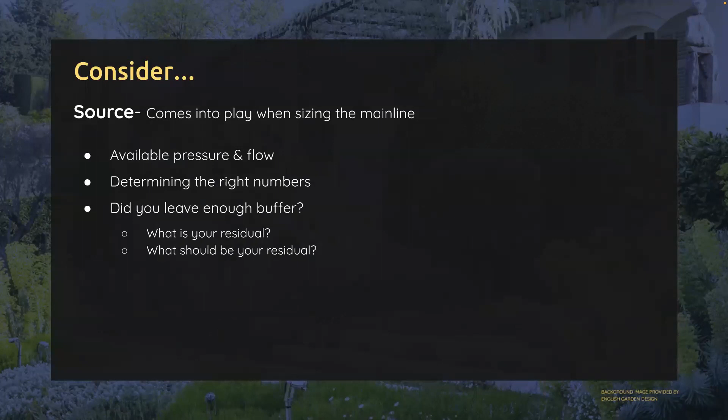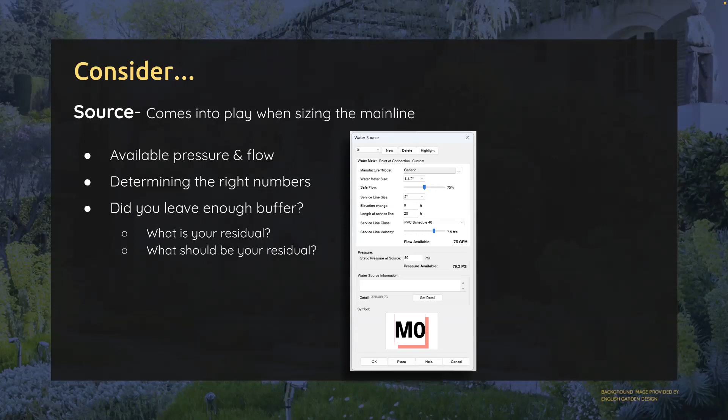But being able to have that conversation about what those numbers are, what we have available, what we even need, is going to be really important so that we're not getting to the end and being confronted with these negative numbers, like, why are we exceeding what we have? Well, if we have that conversation up front, we know how to plan the rest of our design. So it leads right into this buffer of what we should have left over.

A little tip that I always like to tell people if they're saying, I don't know what the source is, or I'm not given those numbers.

Like, how do I know what to put there? If you set your water source as a custom, you can actually zero out the flow and the pressure and get a negative value. And those negative values are going to be what the demands of the system are. So now you can take those numbers and have that educated conversation with the client or the city or whoever it is to say, hey, this is what we need to work. And then you can actually add that additional buffer that you might need on top of it.

I know a common number is 10% of what you have available should be what you have in residual. So if we had a static pressure of 80, we should have an additional 8 pounds to work with after all is said and done.

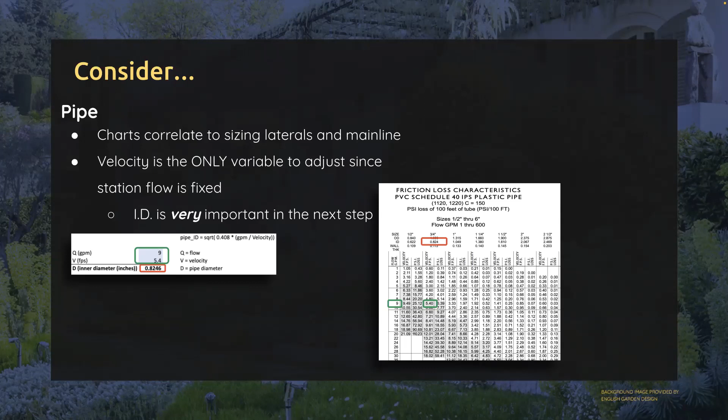So if you compare the formula itself to what the pipe charts show, you can see that I've got a flow of 9 GPM and I want it to be running at 5.4 feet per second. Well, I'm going to need this inner diameter pipe in order for it to operate that way. So if we start to understand these concepts of knowing which values we're looking for and which size of pipe it's going to be given, it's straight up math at this point. And we have tools in Land F/X that really help you with that.

So a tool that I'm going to try to show off in the live demonstration is that flow zone, the little image right here to the left. If you had your own little calculator, this is doing the same thing, but it's nice and built into the system. And you can use that as a cross-check to see what size you're anticipated to get based on the flows and the speed.

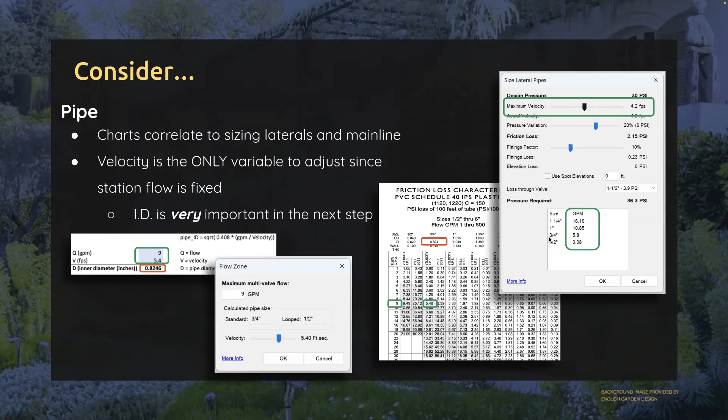And this is why when we're sizing our pipes, whether it's the main lines or the lateral lines, the only variable that we really need to focus on, and obviously there are a couple other options to help buffer that or cross-check and limit what we're doing to the system, is that speed, because the system knows that the zone you're trying to size has a set flow, and you are basically just altering how fast it is going and allowing the system to choose the pipe sizes appropriately from that.

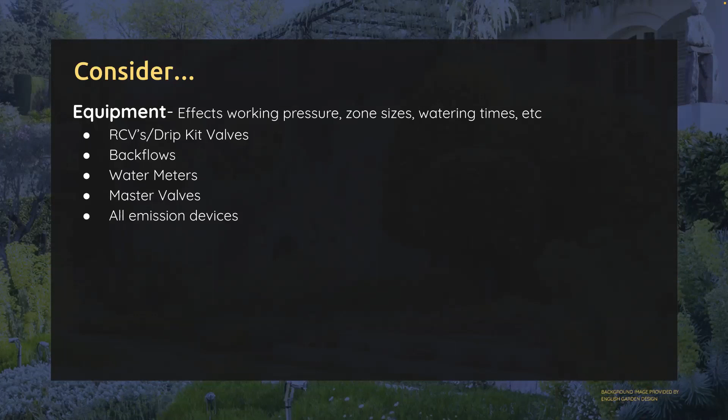The equipment is really determined by a lot of things. Obviously, our site conditions, whether it's elevations and soil and sun exposure, but also client expectations. All of these things should be considered heavily in that discussion right up front. We should be looking at the equipment that we're picking, looking at those pipe charts, looking at the performance data charts, looking at all of those pieces so that we are making educated decisions on, hey, what size should I be using here in this condition?

This is really important when you're just going through that process of picking that equipment, and to be able to then have that discussion with the client, being able to add the equipment that you think you want to use, run a schedule of the entire palette, and have that conversation with a client for approval.

This is going to really mitigate the whole headache down the line of, oh, I picked the wrong stuff, and now I'm battling with this either out of its performance range, functionality, or whatever it is, to be able to dial those things in even before starting.

And the other thing to note here at this level of picking equipment is understanding that we have schematic, and schematic is a really good place at this stage of things because it's way less effort. And again, if we are understanding these calculations, we can set up our schematic areas to function the same way so that we can simply place hatches in areas to generate flows to understand what kind of head types and valve types and how many zones we're going to need at a very basic level or a high level, so that we're not sitting there wasting all the time placing everything just to have to redo it.

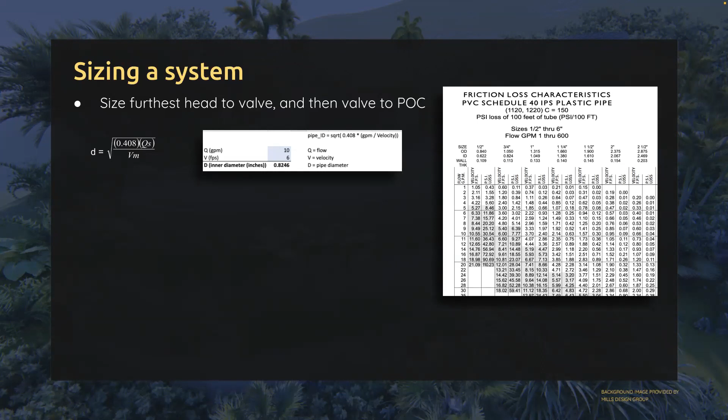Now, when we're doing this, sort of call it the old-fashioned way, we are determining those pipe sizes, but at the same time, we are looking at the velocity and the friction loss, just because this pipe chart is sort of wrapping it all together. But if we're understanding this, it happens in two buckets. We are looking at how much flow we have, and how fast we want it to run, and we're choosing that pipe size. At that point, we then need to figure out that friction loss, and that's that other bucket.

And I'm going to admit here, for the longest time, I was very afraid of this formula, and not understanding, yeah, we use the Hazen-Williams formula, but what does that actually mean? Like, I just look at the pipe chart and that is what it is, right? Well, if we're going to break this down, it's super easy. And I created spreadsheets back in the day to be able to help cross-check, like, okay, these are the values that I need to try to figure out.

What is that pipe coefficient? The smoothness of the inside of the pipe. What is the flow going to be, and what is that inner diameter? So if you know those three pieces, that is literally all we need. And I think there's a misconception of going, oh, the Hazen-Williams formula, it's all about the velocity and stuff like that. Well, it's actually a little bit backwards from that. I just need to know my coefficient, my flow, and my diameter. Well, how do I know my diameter? That's where my flow and my velocity come in. So it happens in two different buckets.

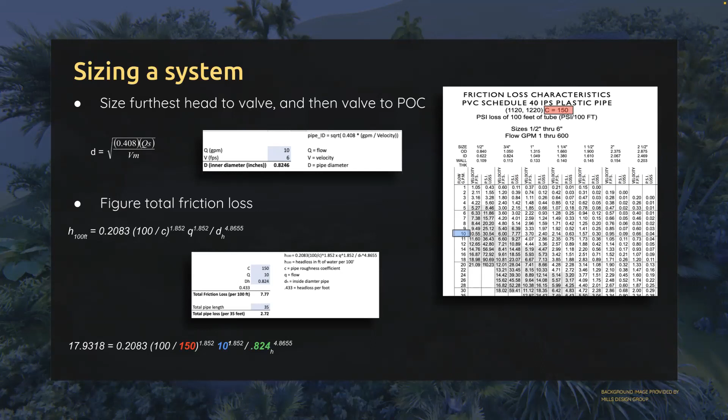But if we're going to break this down and do this little example here, we've got a red number, our blue number, and our green number here. So it's simply three things. If I know my red number and I know my flow and I know the pipe size, because I know the flow and my velocity, I can determine what my actual friction loss is going to be. So this formula really breaks down into these three different buckets and follows the pipe chart perfectly. And that's how these pipe charts were derived. And it's very easy to now navigate this and determine what pipe you're going to need based on this.

Now, the tricky part is this. We can follow these pipe charts for what they are given, but what if it falls outside of this range?

What if it's 10.5 gallons, or what if it's 8.2 gallons? You know, what do we do there? Well, if we take that concept and just know that we have a given flow and the velocity that we want to stick with, it's still going to give us our inner diameter pipe, which means that we've got to fit it into what size is available.

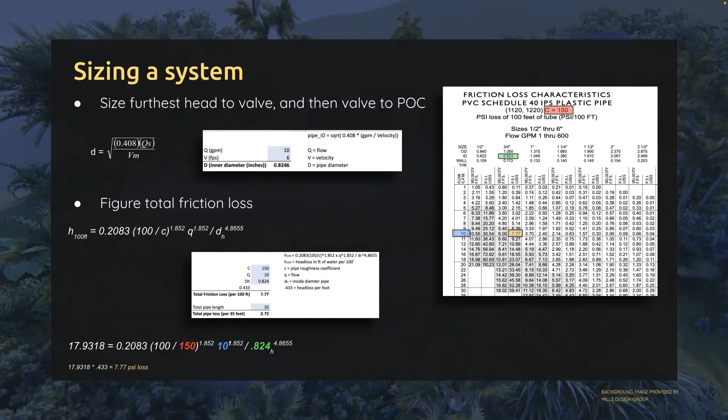So from there, where does that actually play into when it comes to using software? So our design pressure, our emission data, the performance data, that all happens when we're adding that equipment to a project, okay? Every piece of equipment that we're picking from any manufacturer is going to come with all of the data pre-built into it, respective to what we're given from a performance chart, okay?

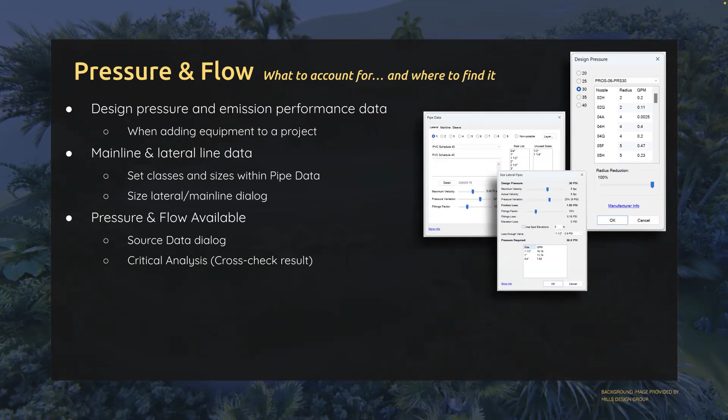And so picking that design pressure is setting that benchmark of, okay, this is what I need to start accounting for from that furthest head, and working my way back through with the given flows per head and how many heads there are and what the length of the pipes are. All of that stuff gets thrown in to then go, okay, based on that, all of my classes of pipe that I'm setting up for my laterals, what sizes am I allowing the system to use in the performance of that velocity, and when I get back to the point of connection, what do I have available? What is my source data set to, and how is that cross-checking?

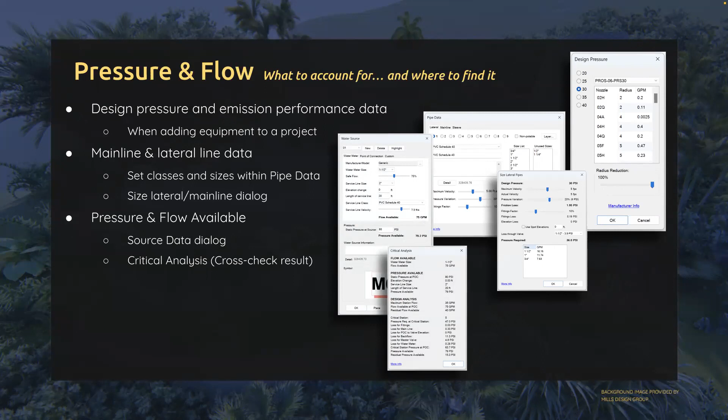So the final cross-check that we're really after here, again, somewhat as a reminder, is a critical analysis. And a critical analysis isn't necessarily, I mean, we obviously want to know globally how the system's doing, but our focus is, what's our worst case scenario? And that is our cross-check. So to be able to run this critical analysis and understand what pressure I have available at my point of connection, are there any elevation differences, to, okay, what's my maximum station flow? Am I in the positive there?

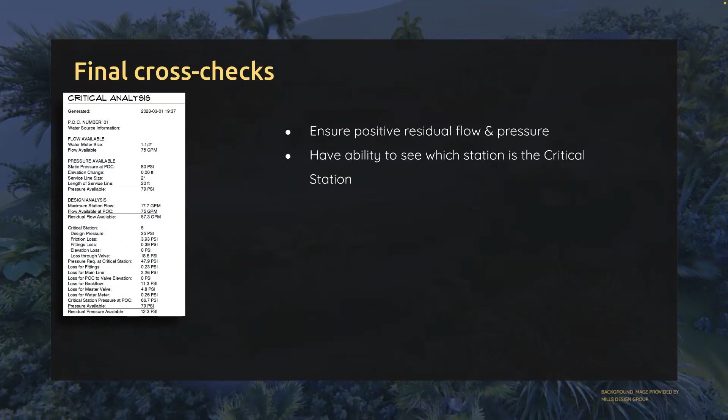And then the most important thing, which is pressure, and what station is causing the worst case scenario for that pressure. And we can cross-check that single critical analysis with a valve schedule, which holds all of that additional information, just to see how every other station fits. And if we know the critical station, and it's our highest demand of everything, then anything underneath that we know will work. And that's why it's less important that we know every single one, but we know for a fact this is the worst critical station here.

So here's our flow that is cross-checking, and then this is our critical station pressure that we need at the point of connection in order for it to run. And so again, what are those residual pressures? Am I in my buffer that I really want? And again, that really is up to the office to decide how much we are willing to have left over. But as long as it's a positive, obviously we're on the right track.

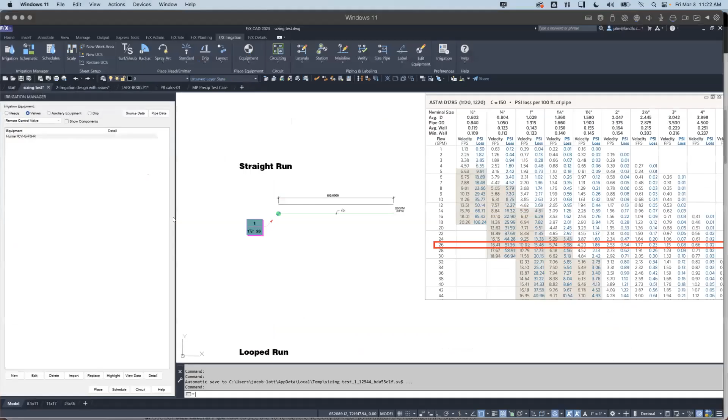And so this you can walk through in the test file that we're going to go over to see how the system's actually functioning with the different paths and lengths and stuff like that. So just know that this is kind of where I'm going the first of it. So we'll jump right over to CAD. And this is going to be what you see here.

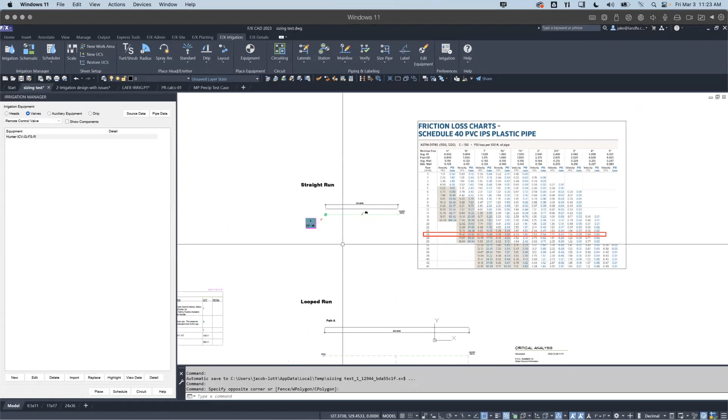You actually will not see this in the downloaded file. This is just for our reference, so that I can compare with a chart right off the bat here. So there's definitely different ways of setting up test cases. And I think it's really important just to understand what our end goal is for what tests that we are producing. So in this scenario here, we're just trying to figure out, okay, how is the system sizing it the way that it's sizing it, the pipe itself right here.

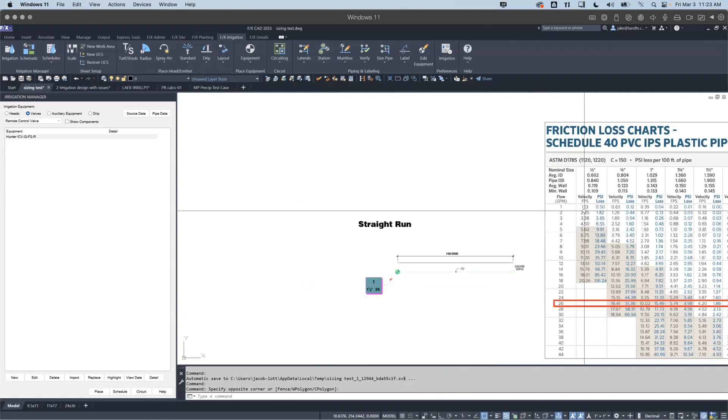So what are the ultimate things that I need for that to happen? And that is obviously a comparable length. So we're doing this in a 100-foot span because that's what the pipe charts are going off of. We need to make sure that we are cross-checking it and using the proper actual pipe class itself so that we're looking at this.

And in my PowerPoint, where we talked about pipe and the importance of that inner diameter, I will tell you right now, there are so many different varieties of inner diameters, even in the same pipe class and different schedules. They're slight, but when you're trying to get an apples to apples comparison to see what the total friction loss is, okay, yes, it's doing that. It absolutely comes down to the decimal place for those tests.

So just understanding that if you're getting any kind of varied result than what you're trying to test, it could be the coefficient, could be the inner diameter from like a 0.001 decimal place. So the velocity by a decimal place, those 3 different little spots really are where we're going to try to focus and try to harness exactly to line up with this.

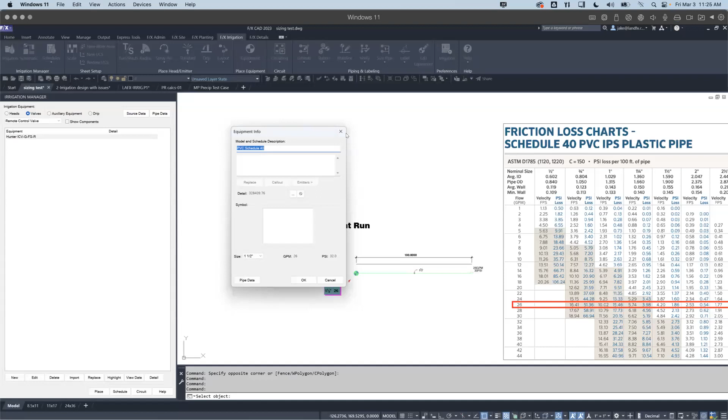But you'll notice that I haven't placed any heads. If we're not familiar with what a cap is, a cap is an auxiliary piece of equipment that we offer in here. It's just right here, this cap. And if you add one of those, it basically assumes a specific demand that you give on it. So set of flow, set of pressure, you pipe to it, the system will size based on that demand there.

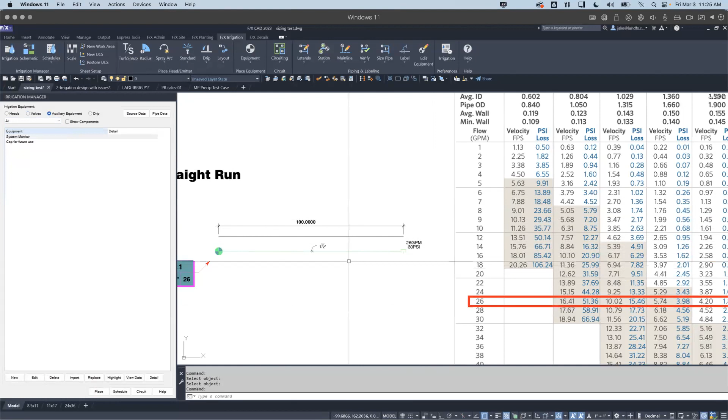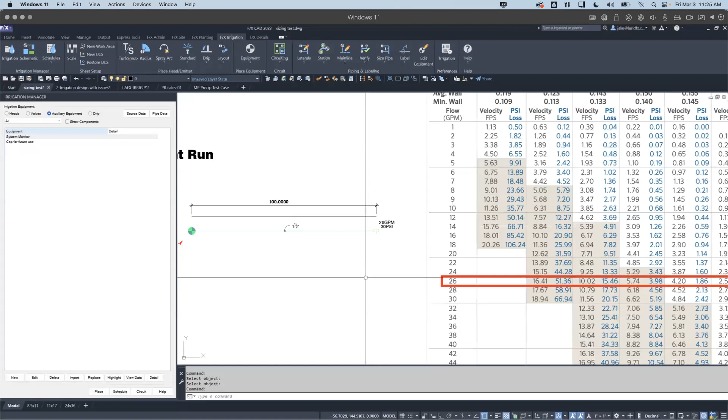So our little quick down and dirty example here, we are going to just use that cap for that purpose. Makes it really easy for us to alter if we're looking at this chart and trying to test another range of flow. Really easy to actually just double click on that guy and change him. But we're going to focus on this one because it has a couple whole numbers that we're going to kind of focus on so that you can see.

So in this case, what we want to do, just from making sure that the system's good, and I guess I should preface this too. Let me go ahead and show you this new flow zone. I forgot I wanted to show this to you. So in the size pipe section, we have this flow zone option. And this flow zone option has other uses down the line, especially in golf course or larger designs that you want to limit flow in specific areas and still let a lot more flow when you're sizing the main line.

You can always click more info to get the full down and dirty on this thing, but we're going to use this tool for our purposes here today as just a cross checker, just a calculator, just to see what it is. So if we typed 26 GPM and we had that velocity set at 4.2, you can see right off the bat that it is kind of following this. So what if we change this to 4 gallons and a 4.5?

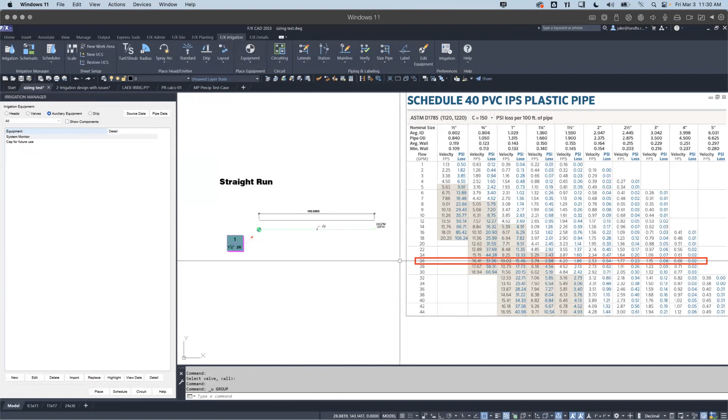So maybe I want to double check it a little bit more and say that I'm going to try to do it at around 5.7, just to see if it's going to really change this 1.5 inches down to 1.25 inches, right? So if I start speeding that water up, nothing's happening because it's within that range of its inner diameter there. And as soon as I get past that point, okay, so at 5.8 here, so 5.74. So this is under that number, which means I'm still fine.

And as soon as it hits that 5.74, where our only option is 5.8, you can see that now he's adjusted. So I know right off the bat, this is finding the exact size of pipe, even based on this chart here. And again, I'm stuck in this horizontal position here because my flow is fixed. The only thing that I can change here is how fast that water is going, and how it's going to size that pipe. That's where it's sticking.

So if I were to speed that clear up, the smallest I could get is 1.25 inches because I can't go up to 10 feet per second. And I wouldn't want to, right? If I slow it clear down, I can see that I'm starting to get into those larger sizes. So that concept of slowing the water down increases your pipe size. It's because it's getting less friction loss and the water is moving much slower through those pipes.

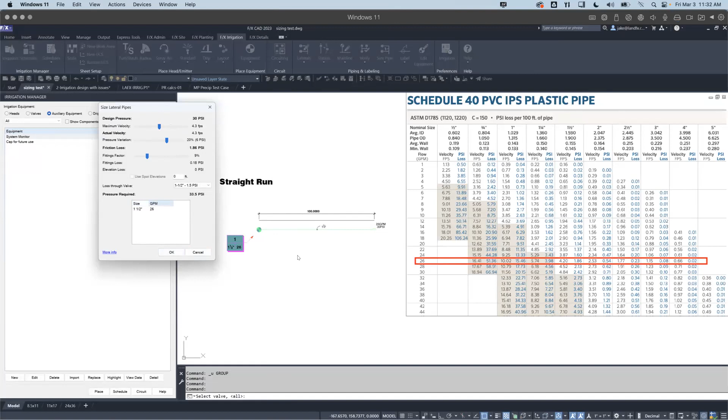Okay, so with that being said, we know that this is now calculating correctly. So I could essentially do really any form of run and a flow at any point and know that the system is cross-checking that. Once we get into those looped runs, same concept applies, but we're now starting to go, oh, you know what? It's splitting the flow.

And here's the difference in what we would typically do when splitting flow around a loop line: we just go, I'm going to split everything just in half. I'm just going to cut it in half. Well, that sort of works. But if you really think about it, and this is how we've thought about it, which path do you think is going to get the water first to this point right here? Well, it's got to be the shortest path, right?

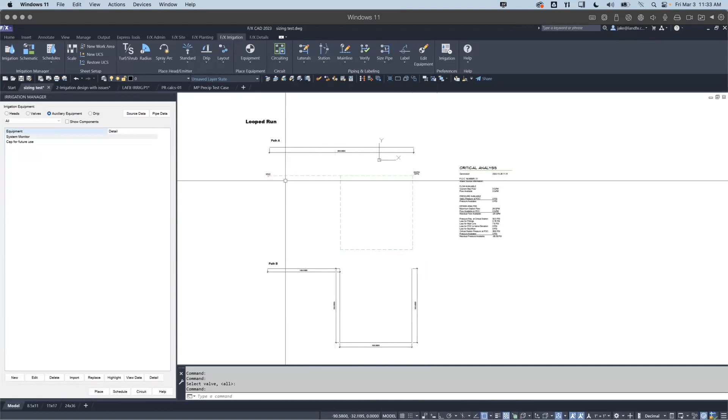There's going to be more water that hits in this run than having to make its way all the way around this way. So what the system is doing is it's splitting from a flow perspective. We'll just edit the equipment so you can see here, this 26 GPM. Well, I've got 17 here, so half of 26 is 13, right? So that's not 13. Well, that's 9. So it must be doing something. Why is less going this way?

Well, we've basically taken the path distances and we've created the percent of the flow that gets through the long run versus the percent of the flow that gets through the short run based on their length distances. So it's calculating those numbers based on that, and then it's calculating the losses based on that demand of water. So it's sizing it appropriately for those cases there.

Now, I'm going to pause right there before we move to the next thing. Are there any questions? Do we have any arguments to where we're at now, Jer? No, nobody's arguing yet. They were going great. Okay, cool. All right.

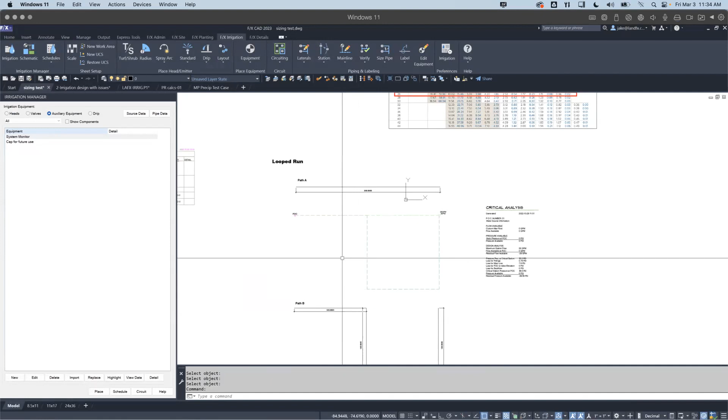Now we're going to jump over here, and my hope is that we can start pinpointing now from the assumption that we've done a project and verified everything. I can't stress enough, from a workflow perspective, that as you verify a system, you're doing this periodically through the design, making sure that you've got all your unpiped heads checked, and on the verify mainline side, that our lateral pipes have been sized. The importance of that is that we want to make sure we're accounting for everything before we start making those final decisions on sizes.

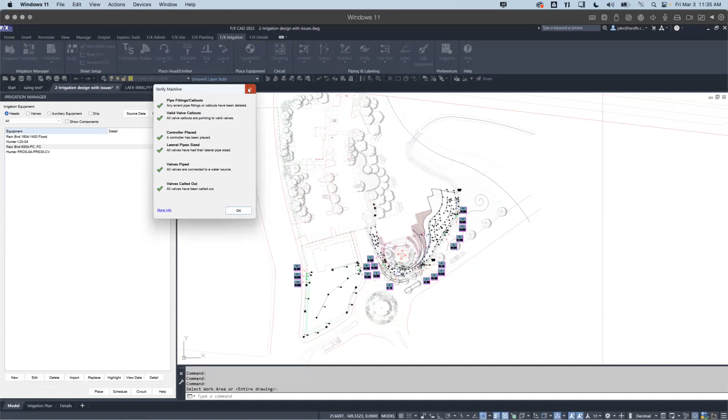If we've sized our valve and we're missing some heads, or something wasn't connected properly, then that valve number is incorrect, which means when we size our pipes or our main line, those are going to be incorrect. So the verify step is super important. So we are assuming that everything is good, ready to go. And one last check: as you are sizing the system, we do have the size all option, where I can just size every single valve. In certain circumstances that's really nice, because it quickly gets you through and sizes it appropriately based on some simpler conditions.

However, I can't stress enough that you should be going zone by zone to actually pull up the size lateral dialog box to make the right decisions. The reason we do it this way is because once you size it and maybe make some alterations in how the system is performing with that zone, it saves that velocity for that zone. But if you size all, it wipes it out and blanket applies the speed for every zone, which, depending on the scenario, is okay. But sometimes different stations require a slower speed in order to actually function. And that's where this actual velocity comes into play. The actual velocity more than likely is going to match whatever we've got here.

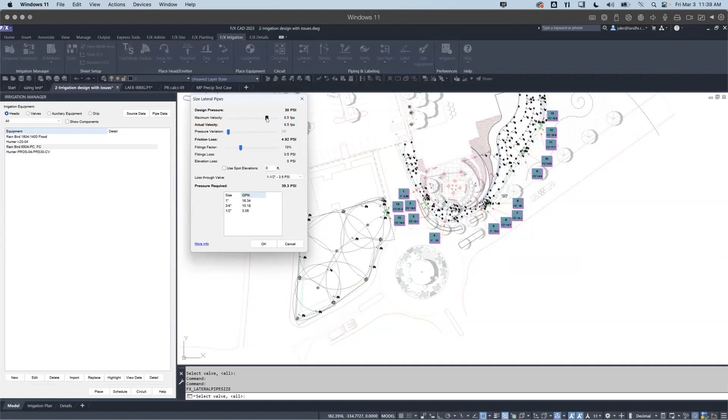You can see there's going to be a time that the actual velocity changes. That obviously changes what our pipe sizes are going to be. But if I set this pressure variation too low, I'm going to have a problem. And so, just in general, if you're sizing all valves at the same time and you have this pressure variation set to where it is blocking a valve from working, this is the message you're going to get. It's going to say, hey, I've tried slowing it down, but I can't get to that. Maybe you need to adjust something, kind of a thing.

So the size all does impact what the system's looking for from a velocity perspective, because it will auto change it if it needs to. But if you're setting that limitation, it's gonna cause a problem. So we'll go ahead and set it for whatever it is. Let's find out where that is, right here. So if we set that pressure variation, you can see that the system's going to say, hey, you need to slow that water down so that it doesn't breach that. And this percentage, by the way, is a percentage of your design pressure. So set it if you want to have those safeguards in place.

Turn it off if you're loose and willy-nilly on things and don't care how much friction loss you got going on. Go ahead and do that. So just know that if this is off, the velocity is going to be the determination on really how much friction loss you got going through the pipe. Obviously up to a certain point, right? The flow itself, no matter how fast you go with that, is only going to go so much based on the size of pipes that you have available. So it'll change in relation to that.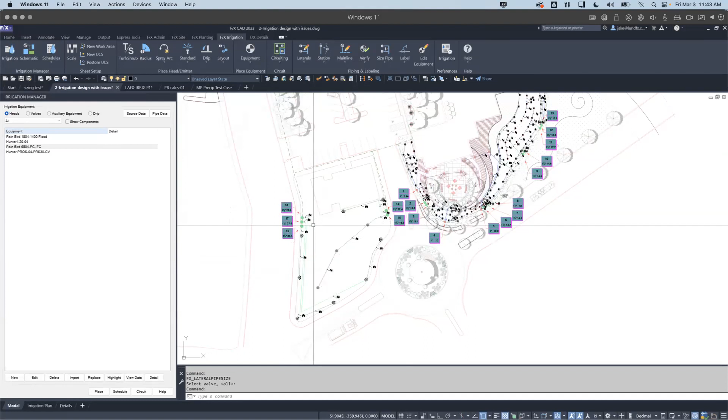Do we want to pause for 2 seconds and just see if there's any questions there, Jer, or are we good? We've got a few questions stacked up that I'm answering now, but I think you can certainly keep going. Cool.

So that's just my little plug as far as, okay, you've gone through things and you're sizing stuff. Just make sure you're kind of aware that that's how we should be doing it. Size all is great.

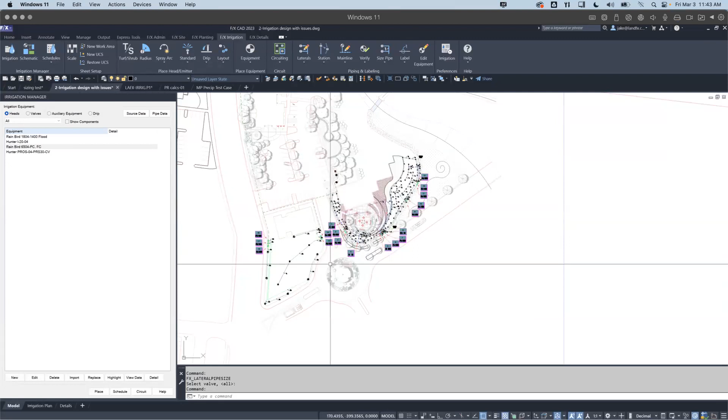I love that one, but it's a little dicier is all. All right, so before getting too much further in here, I really recommend running a valve schedule. This valve schedule is such a good snapshot of how I've got it set right now, before even sizing the main line, before getting into troubleshooting what I might have wrong.

I do enjoy seeing everything. I check on everything just so that I know what I've got going on here, so I'll go ahead and check everything. Now I do have specific work areas, which limits what the system is looking for. I've got a secret other place up here that we're going to do something for, so I'm looking in this area specifically. I'm going to click on that work area and run this valve schedule.

So this valve schedule, and we'll break this down right now, gives us a snapshot of how the system's set together right now. Can't stress enough the importance of a valve callout. If you're not calling your valves out, maybe waiting to the very end, you're doing yourself a disservice, because if you see a bunch of unknowns everywhere in that valve schedule, it's really hard to know where to look for stuff.

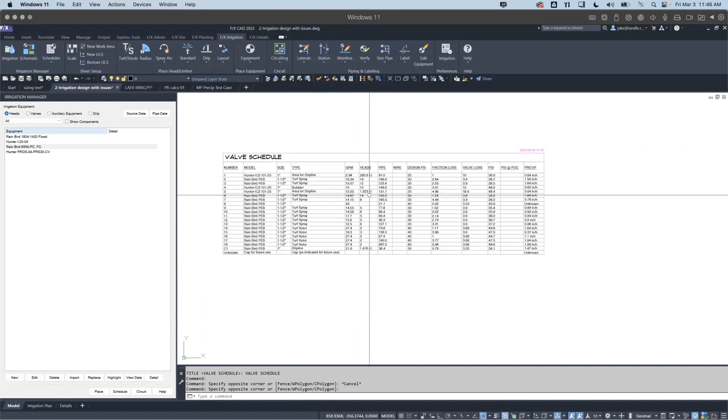This gives you a snapshot of not only the type that it's watering, based on your equipment, but the total flows, the head count, which sometimes is important, sometimes isn't, but it's fun to see how big of a zone this turf spray is versus one of these, and why. Because that sometimes affects why you're getting too high of loss or too low of loss. You can't have too low of loss. But the design pressure, this is a really important one.

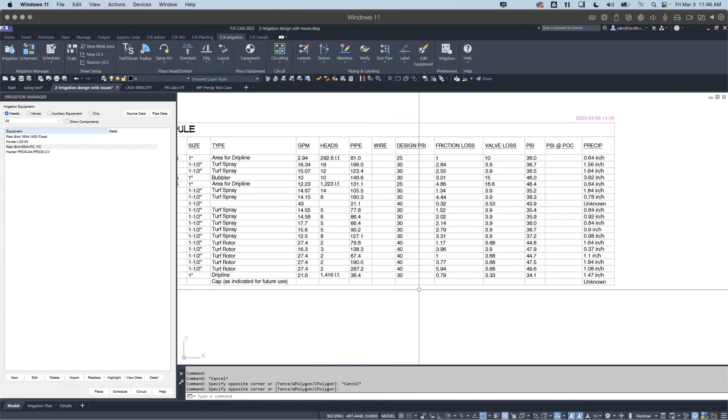This design PSI column is such a good number to cross-check, because as we're setting up our water source, that design pressure should not be close to what we've got. So I can run this valve schedule and look at my source data. Looks like I have 45 PSI available at my source, and after the loss through the water meter, I've only got 44. Whoa, that's a low starting point. I already see red flags.

So if I see these design pressures set at 40, I know that's at the design pressure stage. What is that doing at my actual valve after sizing that lateral? I can see I've already exceeded: 48, 48, 43. So I've already cross-checked myself before the system has stopped me. This is such a good way to start addressing stuff before it even happens.

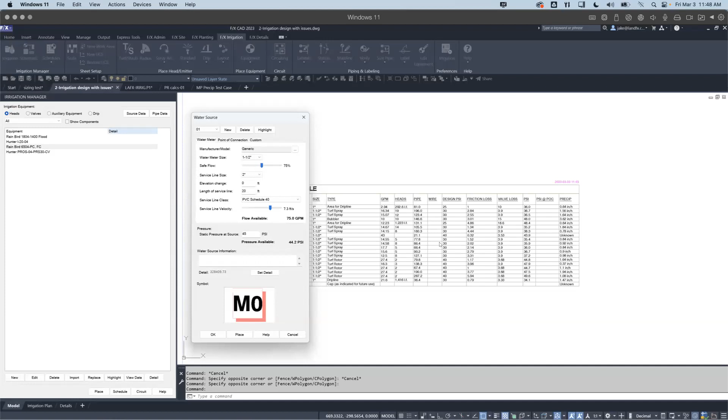And again, knowing that design pressure from the equipment selection point is such a key thing, to know, okay, we've got low pressure, so we can't use larger demand types of heads. Or maybe we do, and we start talking about a booster pump. That's the kind of stuff I really enjoy looking at here.

The friction loss is obviously important from the lateral pipe sense. We can start to see, wow, I've got quite a bit going through some of these, and why is that? I can see these are some of the higher flows that have higher friction loss, and what can I do to remedy that? Maybe I can't.

The valve loss, I think, is one of the bigger points in this whole grand scheme: when I'm sizing this, why is it saying that it's the critical station? It really comes down to the ultimate number of PSI at the POC. We'll get into that next. But I like running that valve schedule; it really helps show how things are. And now we're ready to size the main line.

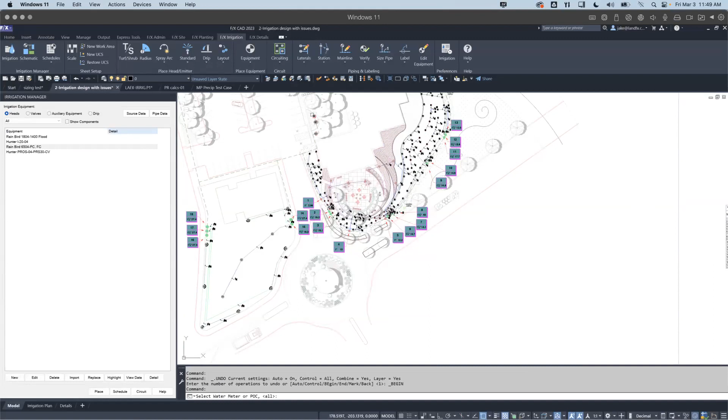So we'll go ahead and size this main line. You'll notice at the command line: select a water meter or POC or all. If you have multiple water meters, I really recommend clicking on the one you want to size. It's much easier to see where the errors are happening, instead of assuming which one has bombed out and why. So I'm going to pick my water meter.

And I have a little simpler box than that size lateral. And the only thing that we care about is, well, 1.5 things: whether we're doing a single valve at a time or multiple valves at a time. And the reason that's important is because that's setting our flow benchmark, okay? So when we talk about the size of pipe, we care about two things. We care about our flow, and we care about our speed. And that tells us what size we can do.

So if we are sizing one valve at a time, this little grayed out number is showing us that this is the highest flow out there, the highest demand of flow, and that's what it's going to account for as it sizes the system. Anywhere else that it hits a branch that doesn't need that, obviously it will size according to that highest flow, but in the system itself, this is the number that it sees.

If you choose multiple valves at a time, this number changes to your available flow from your source data. So it's saying, hey, go ahead and use all of what's available, and it'll combine as much as it can valve-wise up until it hits this number. So if you want to be, call it safe on it, and maybe set it to more of a limited amount, you're welcome to set that here.

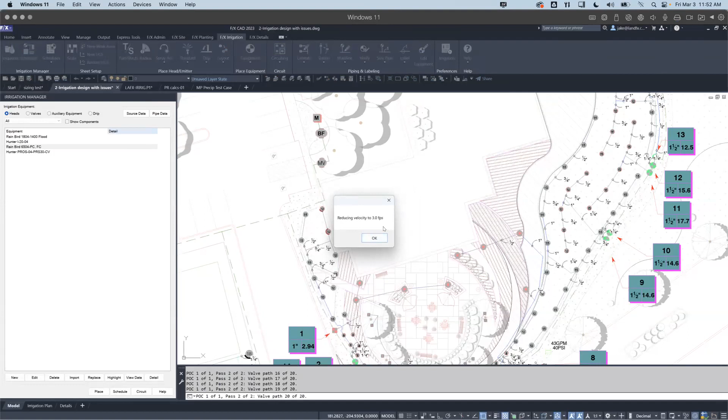The system's only going to go till 3 feet per second. As soon as it hits 3 feet per second, you kind of assume you're not going to pass, because if it stops it here, then we know that something is probably lower than that, and you've got to address it from there. I will suggest that you say yes to this, at least until you start understanding what it is, but it's going to highlight those valves that have the exceeded requirements.

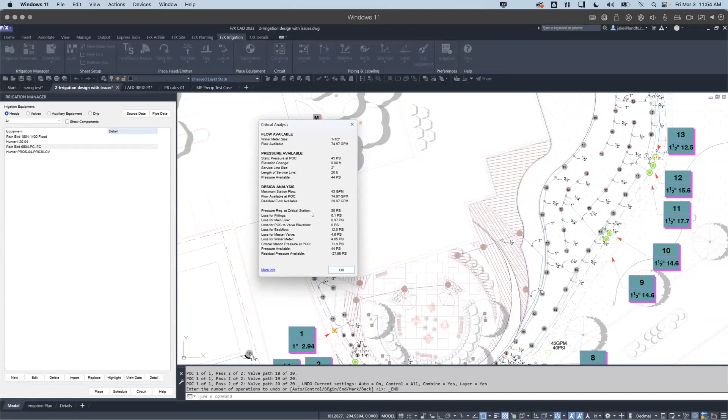So what do we do? Where is that critical station, 50 PSI? It doesn't even tell me a station. And so there's something in here that is requiring 50 PSI. How do I find it? Well, our locate valve command. I type locate valve, it's in the station tool set, right up here in the station. But locate valve allows me to select a POC, or I can right click for all.

And now I can look for, and I'll filter it so that it's in gradual order here. I can see there's the 50 that it was looking for. And there's no number here. Let's see what it is. Found it. It was that cap right there at the end.

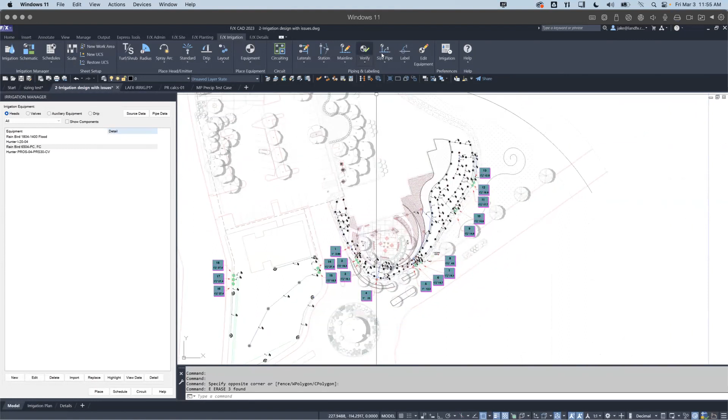I was anticipating for future use, I wanted to size up so that I had a certain amount, but it was just too much. For our purposes and speeding this along, I'll go ahead and erase that, and let's go ahead and just try it one more time. Size that main line.

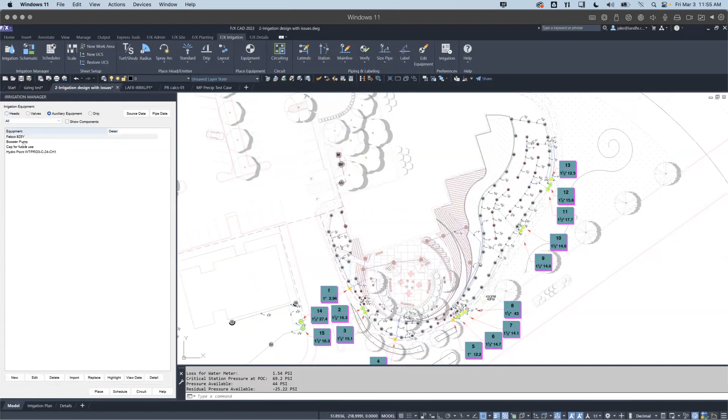All right, so still got it, still hitting everything. All of these valves are exceeded. So now I know for a fact I'll probably have to start looking at a booster pump because I don't have any big ticket equipment things in there. So let's go ahead and just insert a booster pump. Auxiliary, I've got a booster pump already added. We'll just go ahead and place them in here.

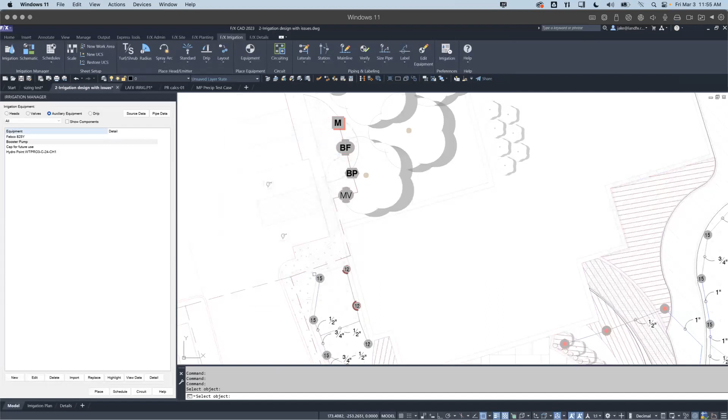BP. And when I add a booster pump, it's obviously giving me that ability to set what my pressure increase is and the max flow that pump can handle. So we'll go ahead and try to size that pipe again one last time because I've increased my pressure. I know I'm good now.

Well, looks like I got a different message this time. And this one's just fun to be aware of, that it has identified valves that have flow requirements higher than what I actually put that booster pump allowed flow to be. So it's telling me, hey, there's a certain few of those that are actually exceeding what that is. I can identify where those are. Yep, it looks like those are some pretty high flows.

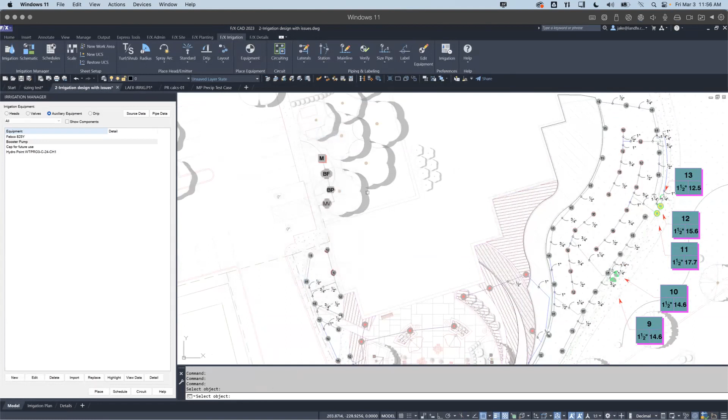Maybe I can edit that piece of equipment, that pump, and say, oh, yep, I only put it at 15. I should probably put it to the right number. And let's go ahead and size. So with the pump pressure increase, the flows to be right, you can start to see that the system is sizing those pipes now. And if you ever get that error and it bombs out, it's not going to finish sizing the pipes, just so you're aware.

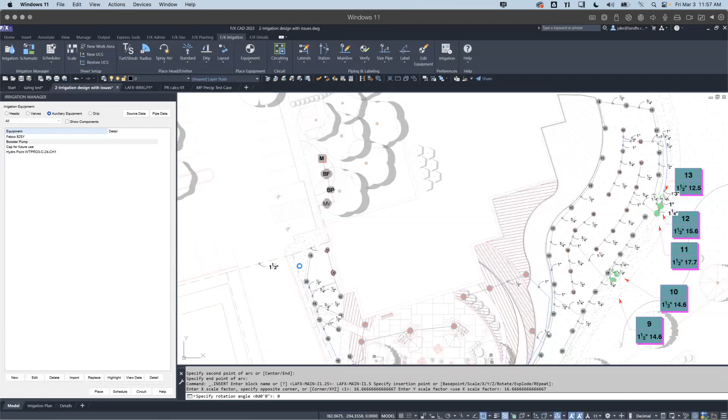All right, we have a positive critical analysis here. We can see what critical station it's finding and the breakdown of that stuff. And so this little first section, loss through or pressure required at critical station, is that valve required PSI. Loss through fitting, mainline, elevations, backflow, master valve, water meter, all of that stuff is through that main line down to what it's cross-checking. So what I need at the point of connection. It's then cross-checking against what I have available, and it's giving me a residual.

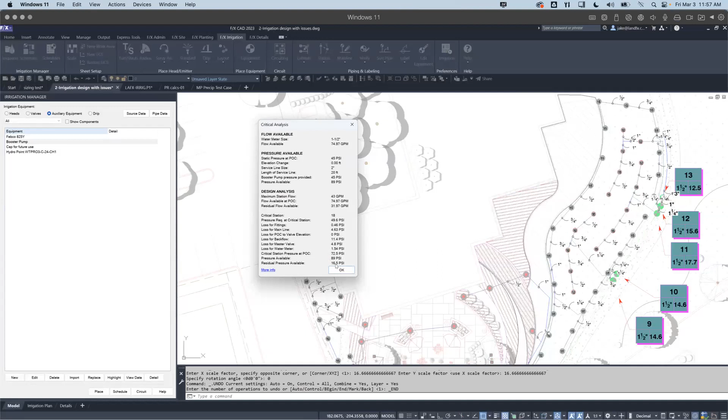So if I were to rerun now my valve schedule, this PSI column is the valve PSI. And now this is, once you've sized, the PSI at the point of connection itself. So we can start looking and seeing the breakdown of what each valve is required that way. Okay.

Okay, from there, see where I got going on here, running out of time. I want to go over then just one other thing. We're gonna jump to another situation. Here, I'm gonna run a new valve schedule. This area right here.

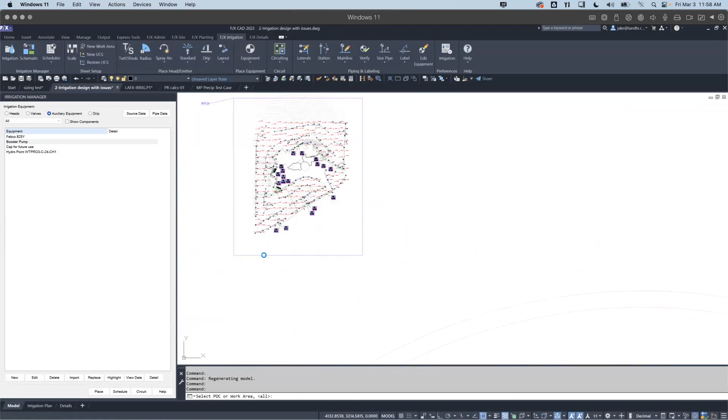And if there's elevations involved, so this guy's is on a big slope here. We got elevations in there. It recognizes some specific elevations here. Some of them look pretty decent. Some of them look really far off.

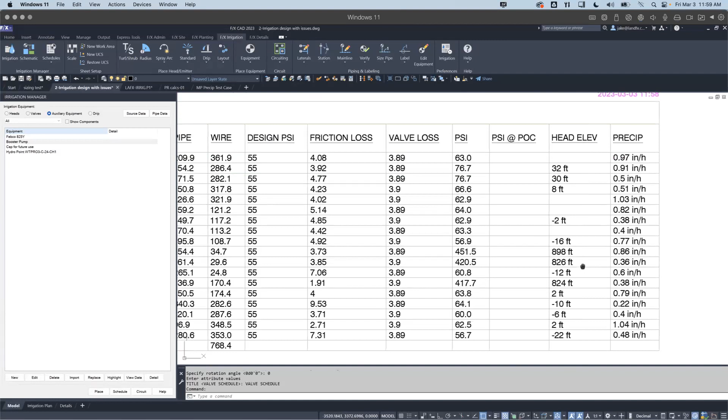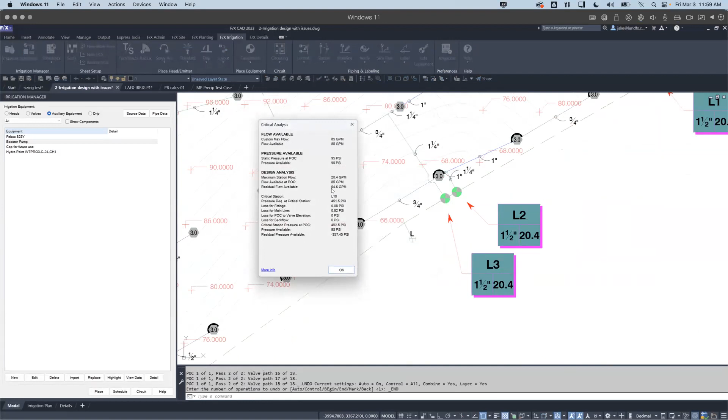And again, when we're sizing stuff and you're getting this, hey, this has exceeded your stuff, I obviously can, again, just go ahead and size this main line right now to say, all right, I think I'm good. And I can say, yeah, reduce that velocity. Okay, why is it bombing out on me here? And I can look through. L10 has a pressure requirement of 452 PSI. Well, we know that's not right.

So how to find the issue there? Obviously, I can use locate valve to find L10. I kind of know where he is. But why is he so wrong? And I can use highlight station. I can click to see where he's at,

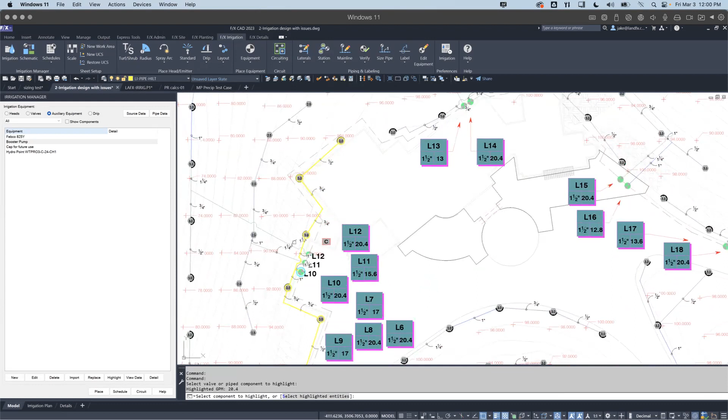but I might not be able to find exactly where the spot elevation is for that issue. I don't know what I'm looking for, right? Well, it's looking for the furthest head to the valve location. So I can look at either end of that to see where it is. And oh, looks like that's where it is. It's catching that spot elevation.

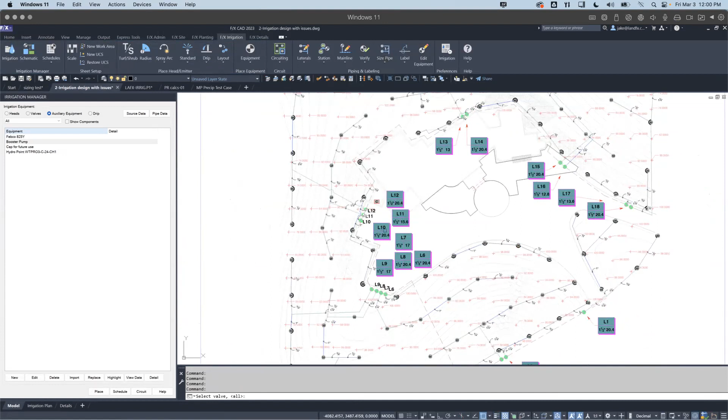So if we were to change that guy to what he probably should have been and resize that valve itself, it's going to fix that elevation. So that's the important part. If you're fixing something out on the site, it's very, very important that you go back into here and resize that zone so that the system can actually take into consideration what it's actually doing here.

So we're going to do one last thing here, show off the mainline profile. So this is a really fun tool, and we'll be releasing it into the ribbon in the near future, or our next release of the ribbon, I guess you could say. But this is just a really fun tool to identify certain things here.

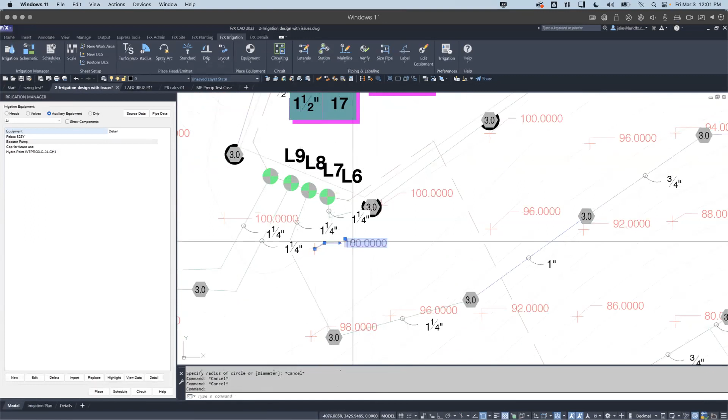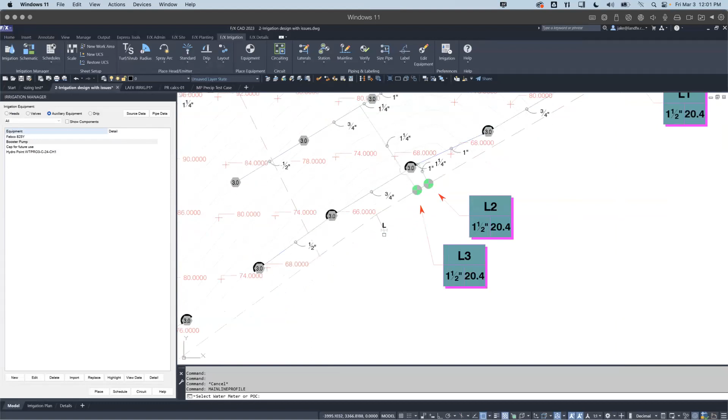So just for our purposes, I'm going to change this here. I need to make sure I see which one it's going to hit first. It's this guy here. So we're going to change him to 1100. Maybe I had a mistake here, and L6 was identified as too high, and I didn't know where it was. Mainline profile. Type mainline profile, and click your point of connection if you have multiple, and then an end node. I'm going to pick L6 here.

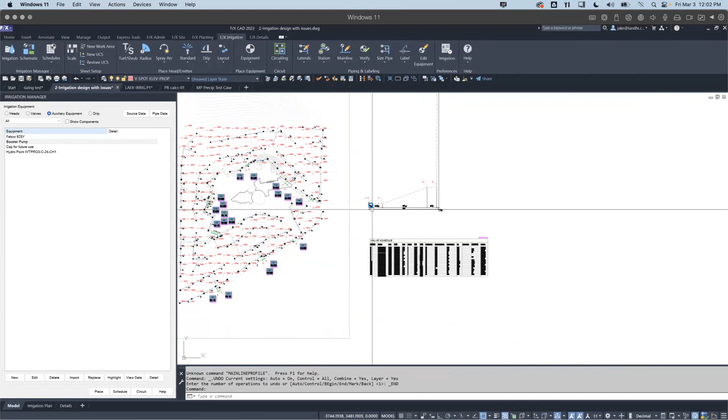Any connection along the main line allows me to run a schedule, a profile of this with its elevation. So I can click that schedule in, and the system's going to chart out that path up to that point, including its elevation. So this is an elevation profile. So from the point of connection, its spot elevations, it's going, and then I've identified, whoa, that's the marker. It's an 1100 foot deal there. So I can essentially know which spot elevation number I'm looking for.

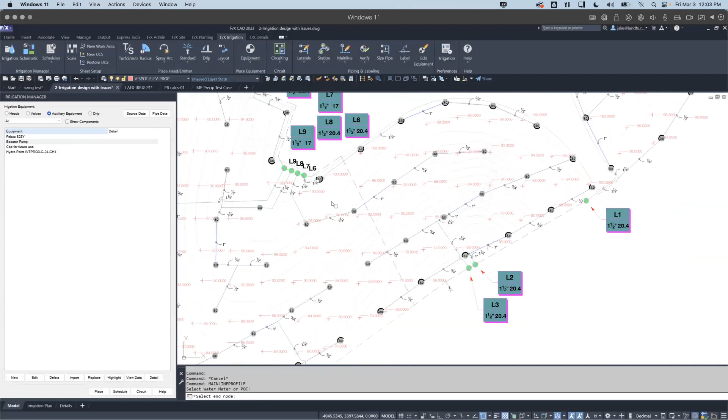So now I can do a find. I can look for 1100. It found that 1100. I can change it to whatever I need it to be. And if I were to run that mainline profile again, here, go here, right here, you can see that it charted it out appropriately for those elevations.

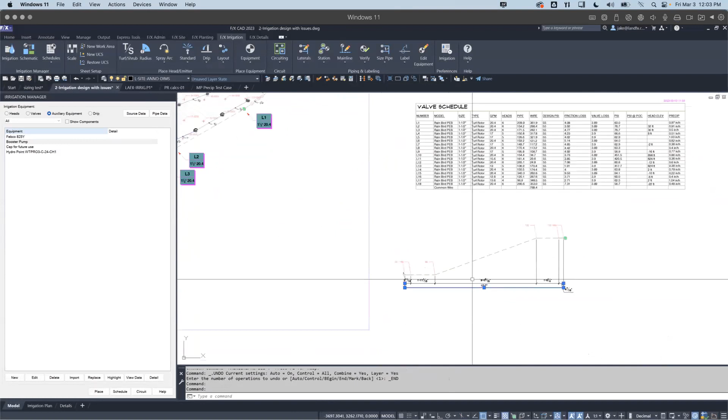So this is just a really cool other way to cross-check, especially distance and velocity and what you're getting friction loss wise and stuff for the lengths. I clicked from the point of connection to a valve, and it tells me my overall distance for what that is. And I can basically do the calculations from elevation loss, friction loss, chart that way.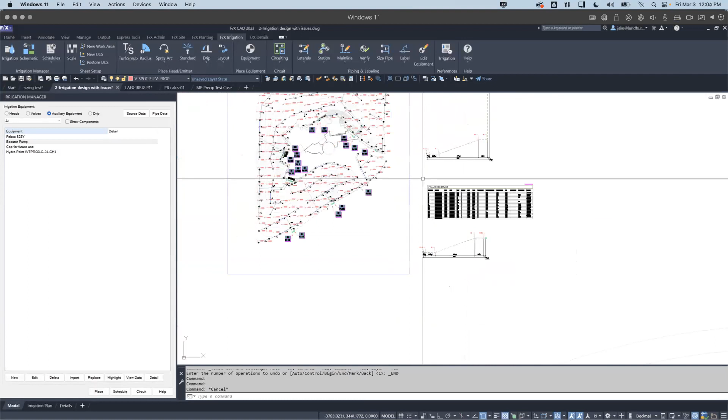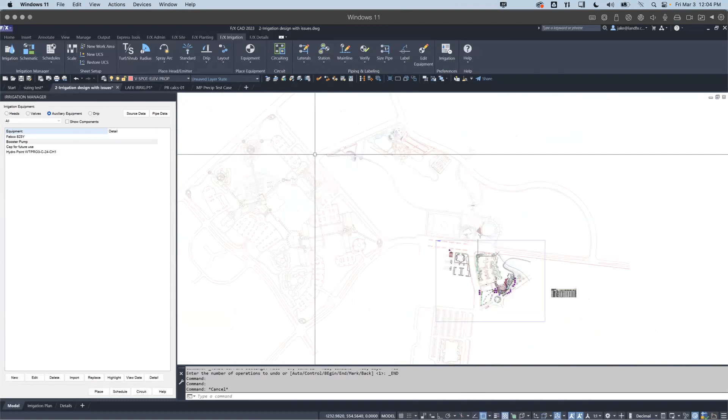So I know we didn't leave very much time, and holy smokes, can we do calculations all day? But Jer, are there any last questions? Well, we had a really nice lively back and forth regarding the friction loss for drip emitter areas. So that was really interesting to consider, what we can do more to calculate some additional friction loss there, also a workaround for that, and also the spot elevation for a valve, the little trick that you did, drawing a circle from the valve. That's a good one. Yeah, that's a good little trick. All these fun little ones.

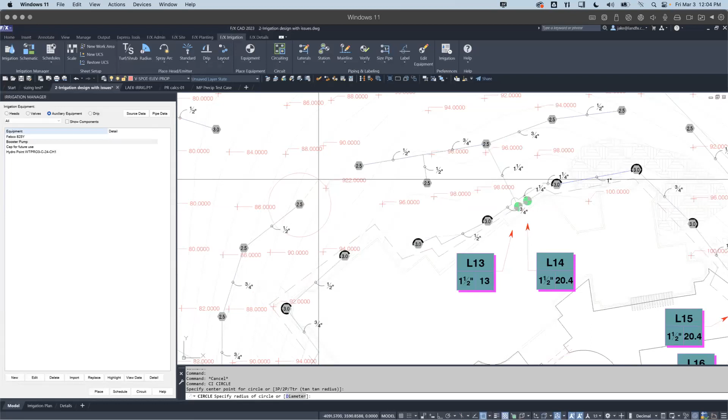Oh, and another really good comment here that just popped in from Michael: if you're able to touch on the pressure losses through the drip control kits. Yeah, let's do it. So the drip control kits themselves, we'll go ahead and just run a valve schedule here really quick.

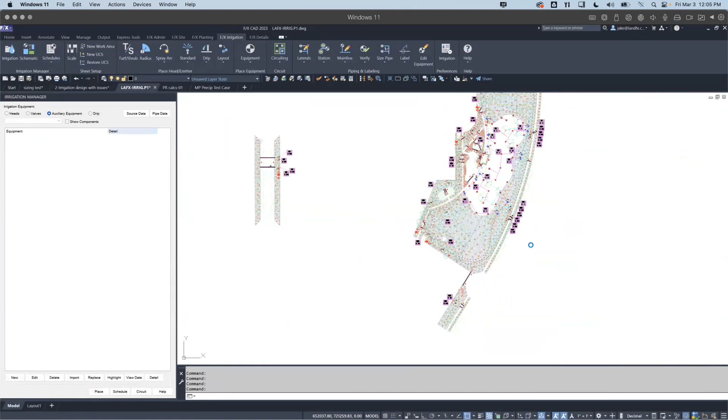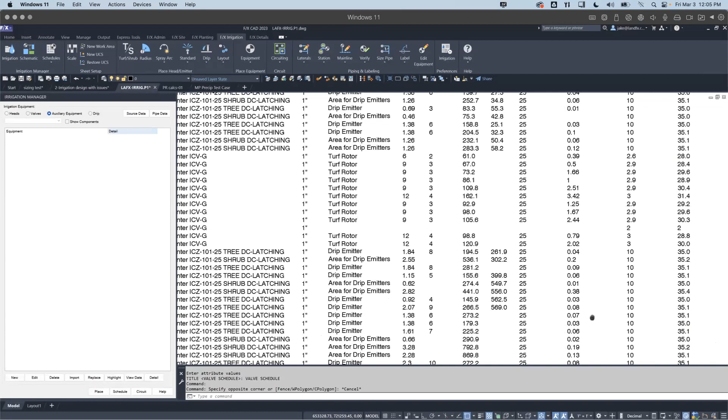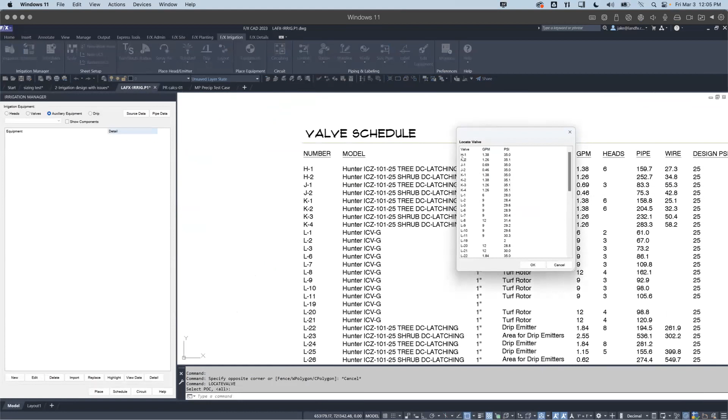Okay, so I have multiple points of connection in this drawing, so there's a lot of different stuff, but we can see that we've got a couple right here. Valve loss 10, right? 2, 3, that's fine. Tens, a lot of tens. Okay, why is that? So I can go to any one of those valves. I'm going to use locate valve because it's my favorite tool. We'll go to H1. There it is. I'm going to edit that piece of equipment.

Here is a little deeper dive into any one of these that you're looking at. There is an analysis button. If you use edit equipment and click on a piece of equipment, or on a valve specifically, you're actually given a little breakdown of what it was sized at. So we know it is using 25 psi as its design pressure, so that equipment is set properly. The friction loss is the loss for the valve. Okay, so we've identified that guy right there.

It also shows me some probably incorrect precipitation rates, but that is a drip area, and you and I need to talk about that, Jer.

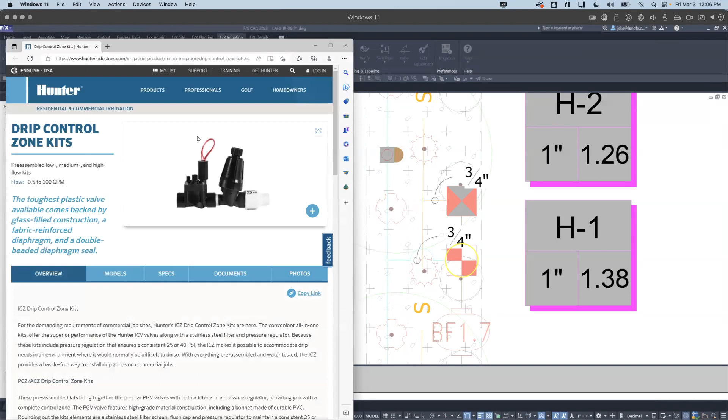But we'll go ahead and use that view data button now. Let's call up that actual chart for what this is. So let's go to our, which one is it? The ICZ 101. So the ICZ 101 is right here. Now, here's what we need to consider: this is all the information we're given. So if you have any problems with the numbers that you're seeing here, it is highly recommended that you reach out to your manufacturer to get any other clarification on this, but this is how we have to address it. So, zoom in here just a little bit.

So required pressure for a 25 psi outlet. So if we want that thing to operate at 25 psi, then we need a certain inlet pressure. Now, if we just take all equipment out of the equation and we're talking about from furthest head back through the valve to know what we need in order for this zone to run, we can just assume that this is a loss. Now, this loss is considered a pressure differential to the manufacturers, which I'm still questioning what the difference is fully. Unless we get different numbers, this is what we have to consider a loss. And so for it to operate at 25 psi with 2 GPM going through it, it needs to have 35 psi, which is a 10 psi difference.

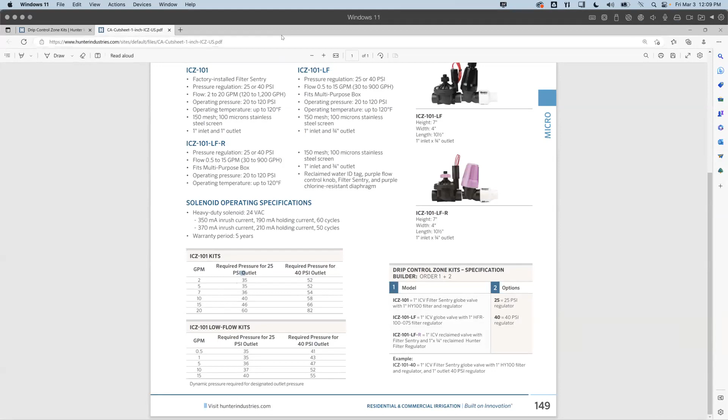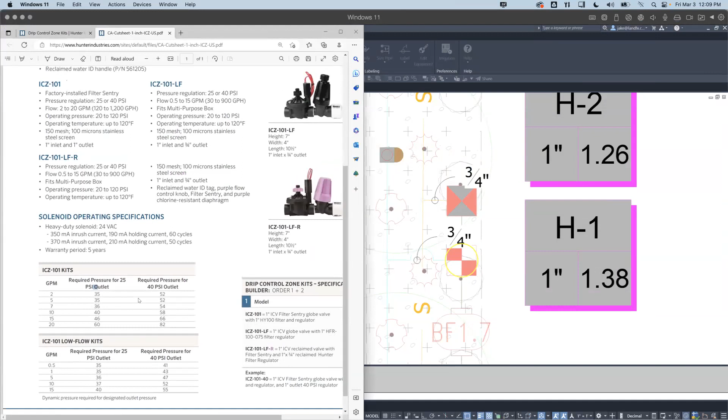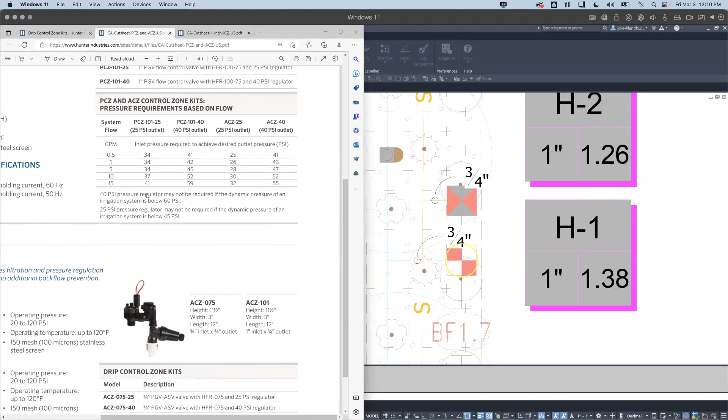Now, if we don't have that to begin with, if we have lower pressures, there are several different things that could be done, but specifically right here in the charts, they say, hey, if you have any kind of starting pressure or working pressure below a certain point, you might not need the regulator, right? So just understanding that pulling that regulator out, filtering it properly, using that same standard valve that's coming with the kit will sort of remedy that. And if you have questions or issues with it, the manufacturer is absolutely willing to hear that, so that we can try to get information more appropriately put in. But that's literally all that it is.

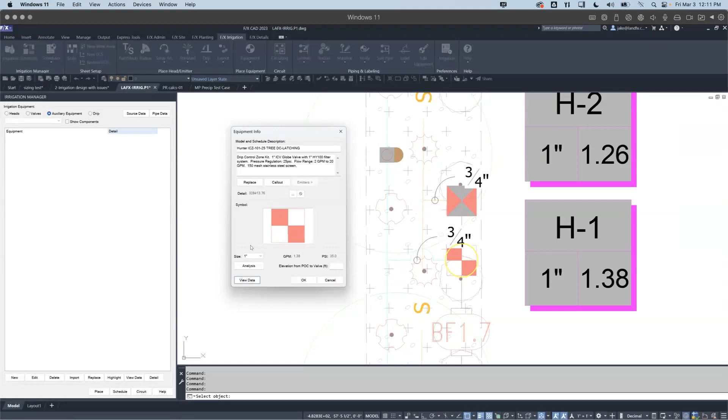Okay. I know that was a long-winded answer for that, but hopefully that helped. No, it was good. I think it highlights just so many things. It highlights our challenges with interfacing with the manufacturers and getting this data right, but it also highlights the overall efficiency of this whole endeavor that we're doing. Instead of having 1,000 different irrigation consultants all individually calling a manufacturer trying to figure out, is it pressure loss or pressure differential, it's just us interfacing with that manufacturer. It's all the benefit of a middleman, if you will, right? There's certain times it's very convenient to have a middleman so that the manufacturer is not slammed by all these end users all having to replicate the same thing.

So I just really think it shows how helpful that is. And as we talk more with Hunter and other manufacturers on perhaps a better way to illustrate or show it, then it just goes out in an update and everyone benefits from that.